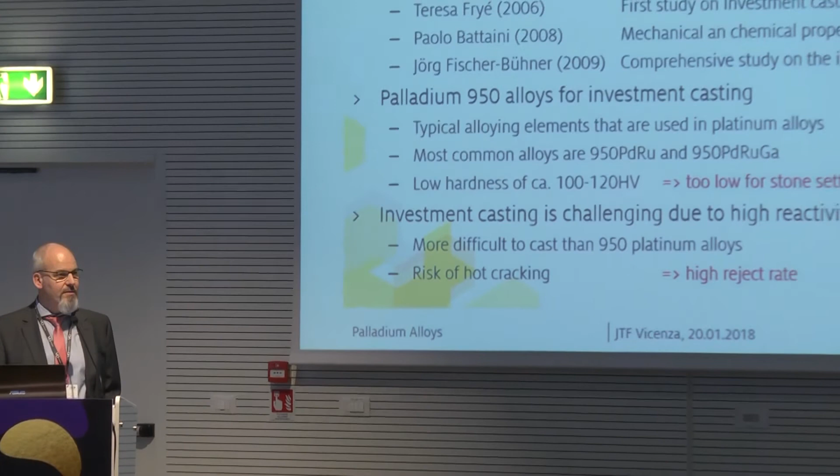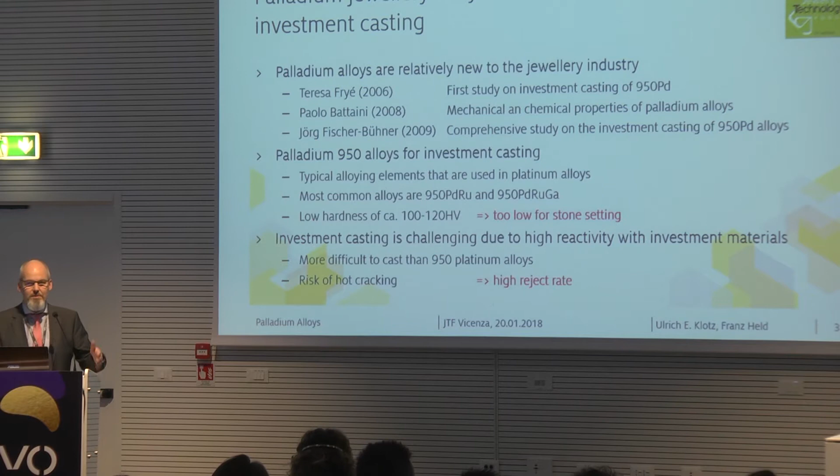Palladium is relatively new in the jewelry industry. Maybe 10-15 years ago there were first studies by Teresa Frye on the casting of 950 palladium alloys. Then some years later there was a paper on the mechanical properties of palladium, and about 10 years ago there was a research project at FEM conducted by Jörg Fischer-Bühner, my predecessor at that time.

Casting trials with many palladium alloys were conducted. Then the interest in palladium decreased a little bit, and it came up recently because palladium is always standing next to platinum. Platinum is well known, it's established, but palladium, as I said, is not very well known.

One issue with palladium is the relatively low hardness. We have a Vickers hardness of only 100 to 120 Vickers, which is a little too low for stone setting to hold diamonds or other stones firmly, and therefore there's always a risk of bending and distortion of such jewelry.

But another issue is the production point. Palladium is even more difficult to cast than platinum because it's even more reactive than platinum, so you get the risk of porosity—shrinkage porosity or gas porosity in particular—and there's also a risk of hot cracking.

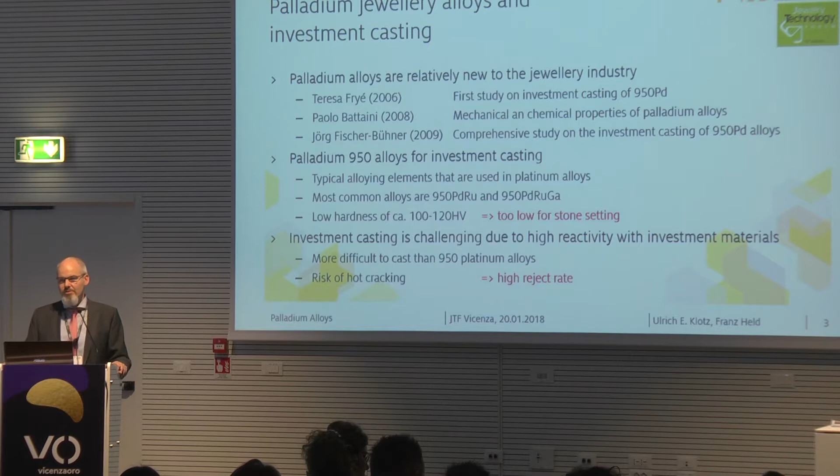This in general leads to quite high production costs, which might be even higher than for platinum, but at the same time the price of palladium was lower than for platinum, and of course the renommée of the alloy is not as high as for platinum.

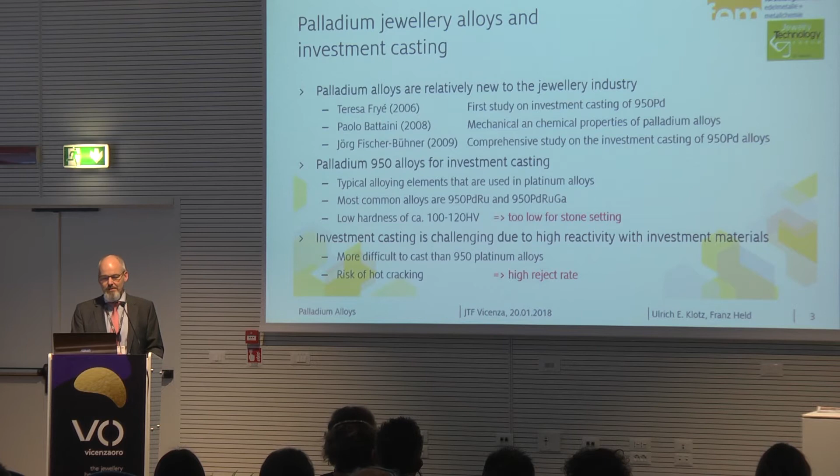So the risk in casting of palladium is demonstrated by some pictures here: a completely broken casting tree where all parts are broken. In the metallographic cross-section they are full of cracks, and in the cracks you see many dendrites—a picture you might know from this morning with these dendritic structures.

If you have a closer look here, you see these dendrite tips, and we measured the chemical composition between the dendrites, finding deep melting phases. The alloy had reacted, in this particular case, with the investment material, resulting in very strong embrittlement and complete fracture. This is a risk in palladium, and such material cannot simply be remelted and reused—it has to be sent for refining.

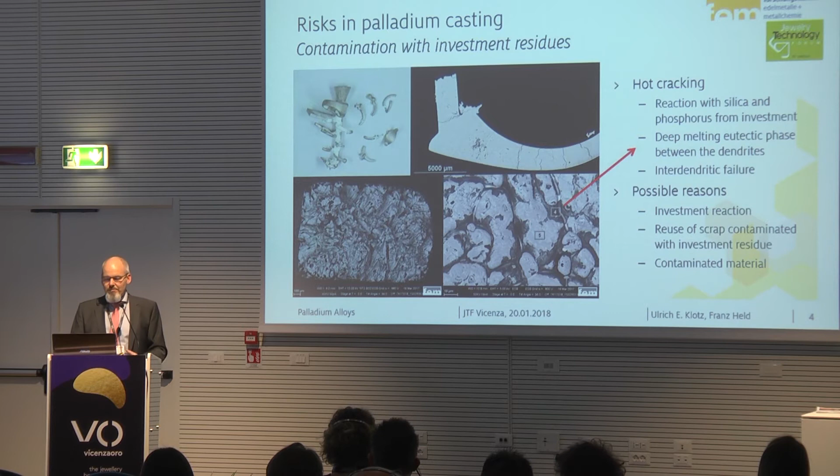With this in mind and in the background, we started the development of new alloys. Nowadays computer technology allows simulation of alloy compositions to determine the melting point or melting interval, and the segregation of certain elements—that is, chemical changes during the solidification process.

You also get information about the reactivity of the melt or even age hardening. With that you can save a lot of time, money, and precious metal, because you can do many calculations and find out what are suitable alloying elements.

Then we started working. We developed about 40 alloy compositions, tested them, made centrifugal castings, and evaluated the most important parameters like form filling, surface quality, porosity, and hardness, which was one of the key points. Our benchmark was always the most established alloy, 950 palladium ruthenium. But if this alloy is established, why do something new?

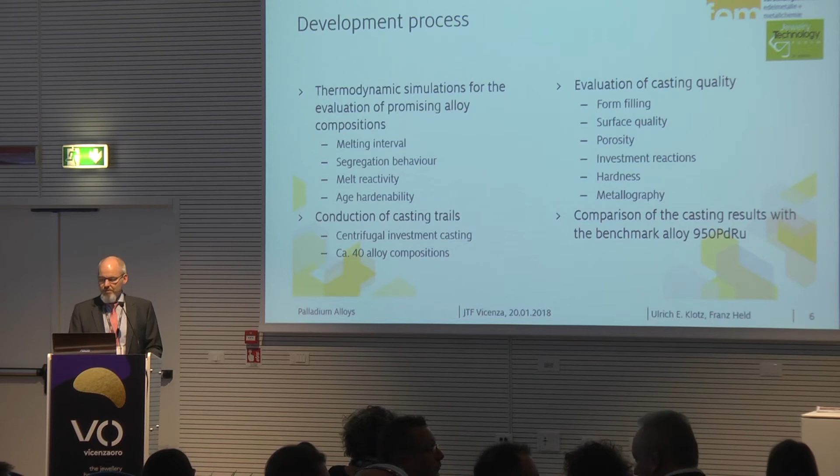The figure here I show is the so-called phase diagram. It shows the melting and solidification temperature of a mixture of alloys. On the left side you have pure palladium, on the right side pure ruthenium. Our alloy is here, and this line shows the melting temperature, or exactly the melting interval.

Such phase diagrams allow metallurgists to understand materials and their behavior. Our objective was to have form filling, feeding, and micro shrinkage at least comparable to 950 palladium ruthenium, but with hardness in the range of 130 to 160 Vickers, an established value for platinum alloys with good properties. This provides suitable stability. We also want a certain grain refinement to get fine grain structures, which have more homogeneous properties and higher hardness.

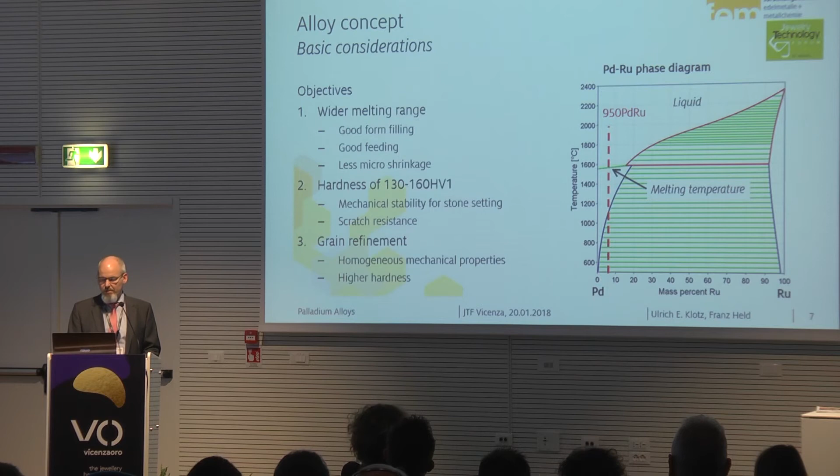But of course not all elements are suitable. Some of them are toxic, like tellurium. Others, like silicon and germanium, can result in very severe embrittlement, like what I showed you in the beginning. Others, like zirconium, niobium, vanadium, titanium, are very reactive and not suitable for the investment casting processes used in the jewelry industry.

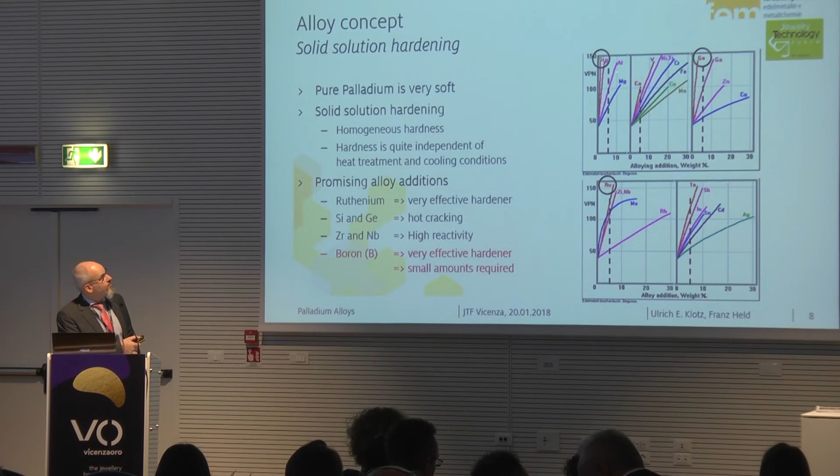Gallium is also an element that is used in platinum, but it's not working as well in palladium. Here I showed you the phase diagrams of the palladium-gallium and the platinum-gallium systems.

The red line shows 95%. On the right side you see the platinum system. The red line is intersecting this line here, meaning there is so-called precipitation hardening. Small precipitates of an intermetallic compound of gallium and platinum form, resulting in significant hardening. But this does not work as well in palladium because palladium has a higher solubility, so the hardening effect is much less pronounced. Similar effects occur in other elements like indium and tin that are other candidates.

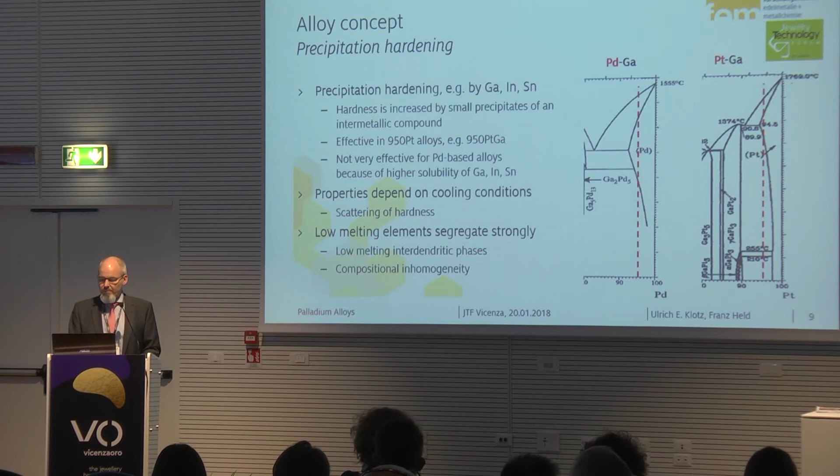Therefore, we were not sure if gallium would be the right choice. So then we started with the simulation, and here I show you such a simulation result.

The lines here, each color stands for a certain chemical element. This shows the liquidus temperature, the upper line, and the lower line is the solidification temperature for each element. This gives us an idea, if we add 5% of each element, how this affects the melting temperature.

Our objective was to widen the melting range a little bit, because in palladium ruthenium it is very, very narrow, and this is detrimental for casting because it allows very low feeding. So the metal solidifies all at once as the temperature is reached, but if you have a certain melting range, the metal can flow longer.

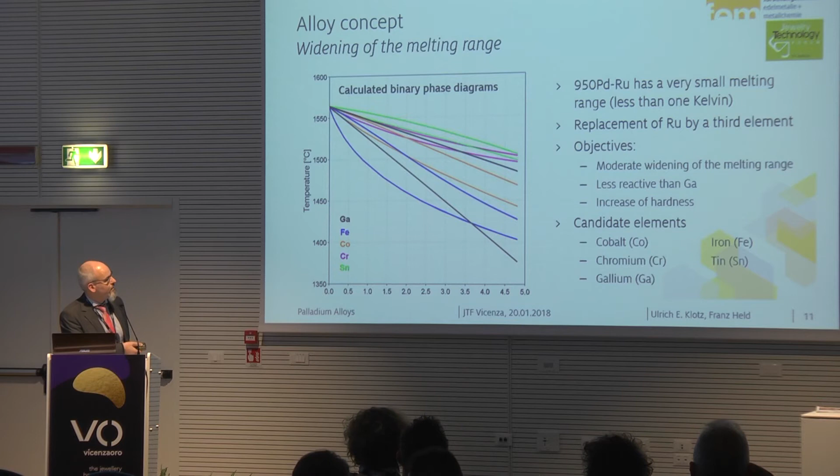So we think there are some candidate elements that lower the melting range. There are more elements like rhodium, platinum, gold, silver, and copper. They also have effects on the melting range, but their effect on hardness is very low. Therefore these elements were of less interest.

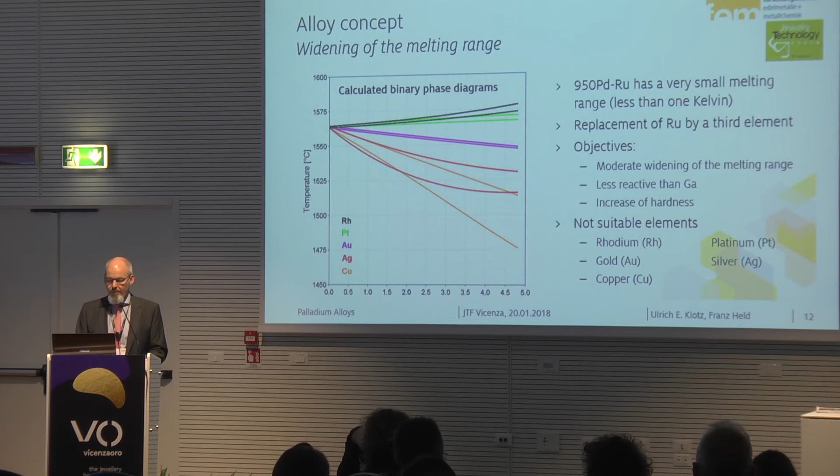Then here comes the first list. This is a selection of alloying elements that we prepared. We have palladium, ruthenium as the basis. Then we added cobalt, iron, copper, chromium, and so on. With these basic binary alloys, we could make mixtures of many alloys that contain, for instance, palladium, ruthenium, and cobalt, so we could vary the composition quite easily in a very effective way.

Then, as I said, boron was an interesting element. Here we added very small amounts, 1 to 5 per mil only. Aluminum was an interesting element, and we also tried things like zirconium, but as I said, this is very reactive.

We started with these elements, with these alloys, rolled them, determined some basic properties, and then alloyed them to make ternary alloys.

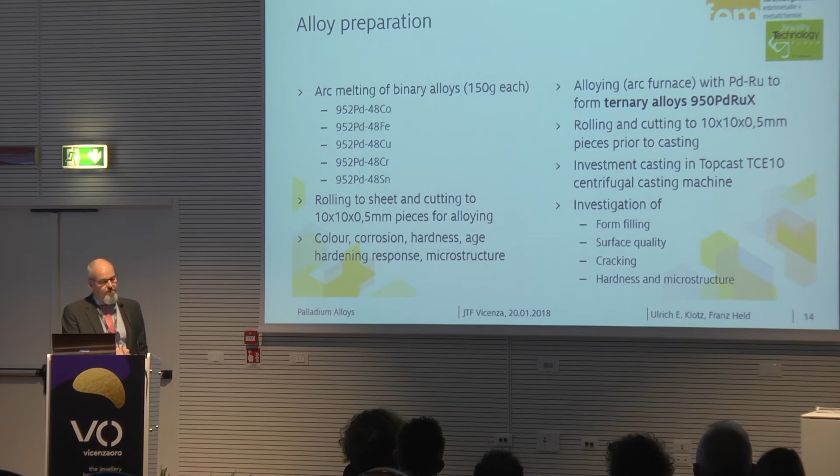With these ternary alloys, we did our investment casting trials, with the properties characterization. This is a typical casting tree that we set out: a thin main sprue and then some standard parts like a grid for form filling, a plate for surface characterization,

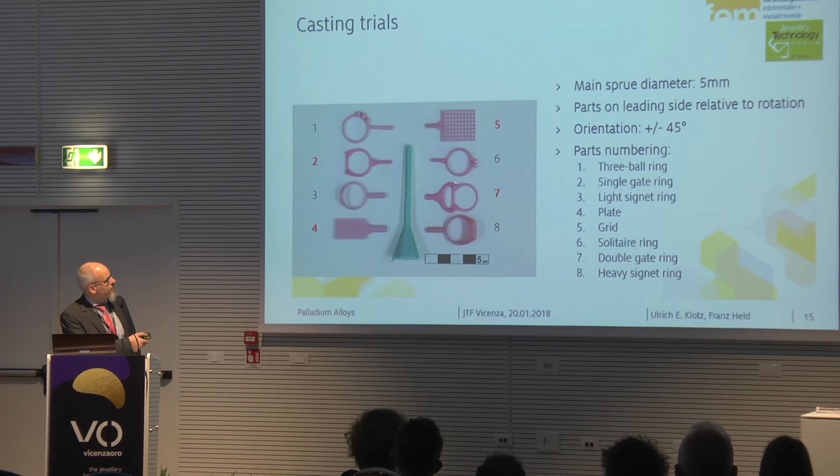or these rings which are basic rings to mount setting areas for diamonds. Here in this section, we call this one the single gate ring with one gate at the thin section. This morning you learned that this is not a very good situation because you get shrinkage porosity here. And then we had an opposite ring, which we call the double gate ring, with sprues at the thicker section.

So these are just some examples that allow us to get a principal understanding of the material.

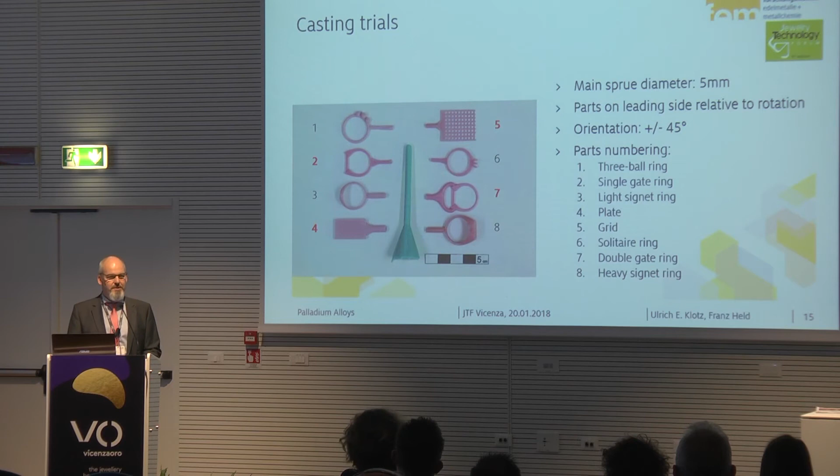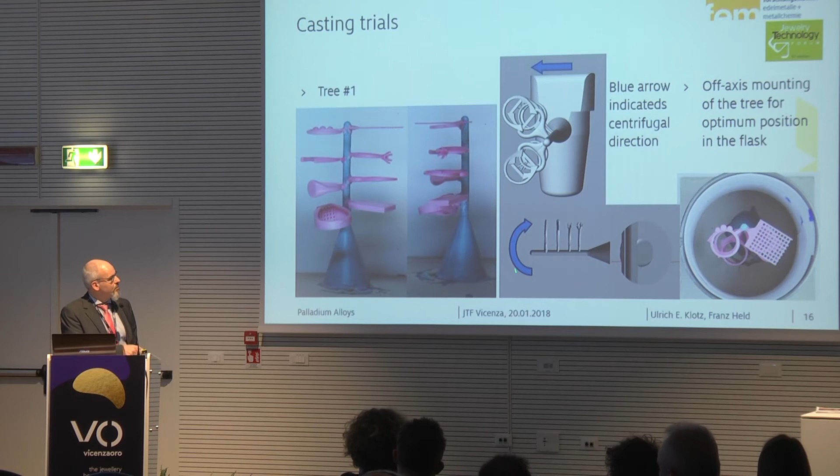We prepared wax trees, mounted them, and used them in centrifugal casting. This is a model of the tree and the crucible, and here you can see how the parts are mounted. The blue arrow indicates the centrifugal direction, so the parts are mounted on the leading side of the tree, which gives optimum form filling.

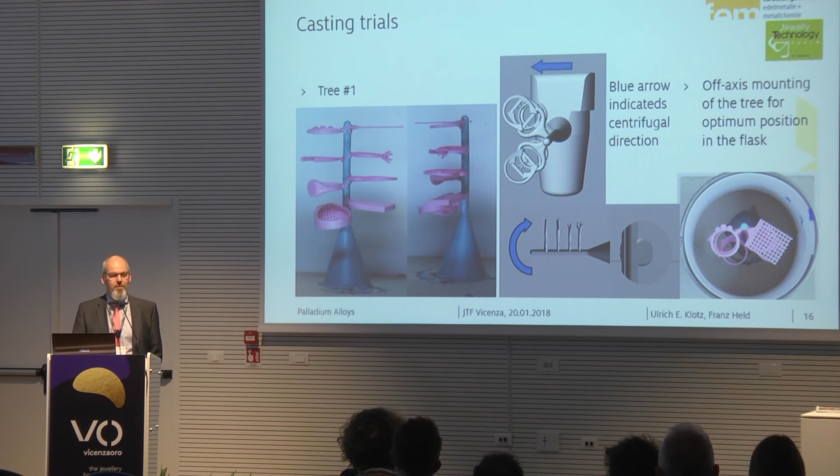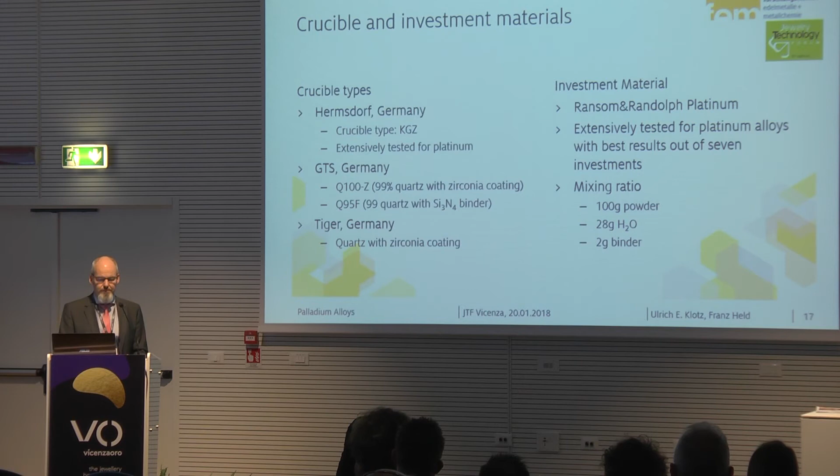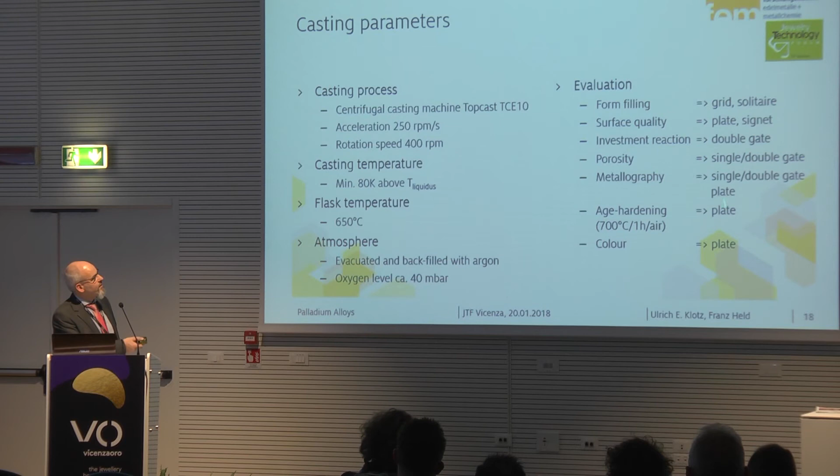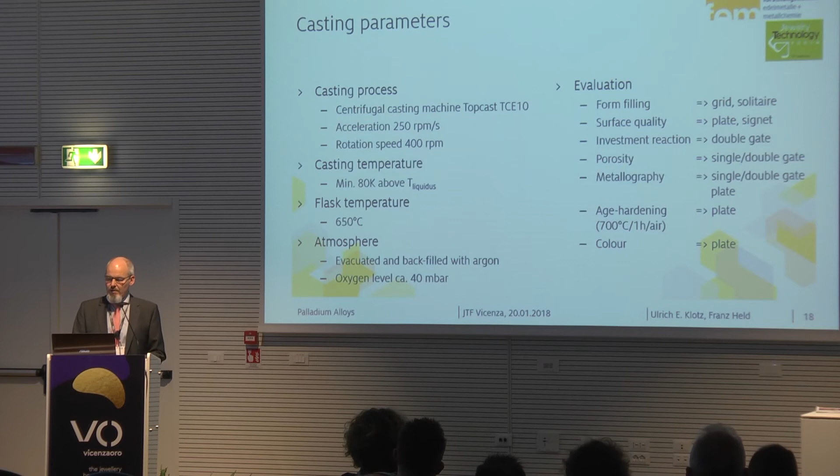These are all the investigations we made on the different parts, and we also tried some hardening treatments. Now, when we do the process, we have to take care of the process control, and therefore we work with a standard casting machine, but we have some sophisticated characterization methods in line during the process.

For instance, we have a thermal imaging camera which is mounted here and has a view on the melt. This is a typical image at the moment where the melt flows out of the crucible, so we can record the temperature very precisely, and we can identify different situations.

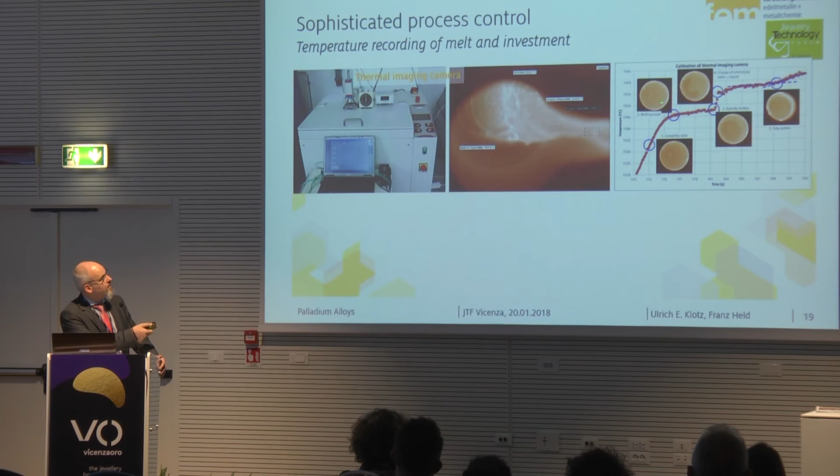So here everything is solid. Then melting starts, then there is a jump here - this jump is a measurement effect that happens during the melting process.

And then we get the melting temperature, and then there is a kink here in this line, so it's more or less horizontal, and then it increases. This is the point where melting is completed, and then you have to have a precise temperature control to cast at the right point.

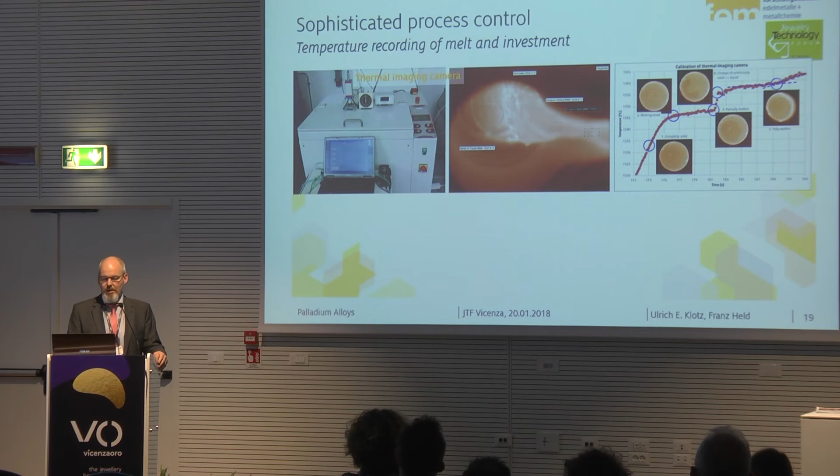We also learned, thank you Jörg, it was very illustrative. Without your presentation I could not do this one.

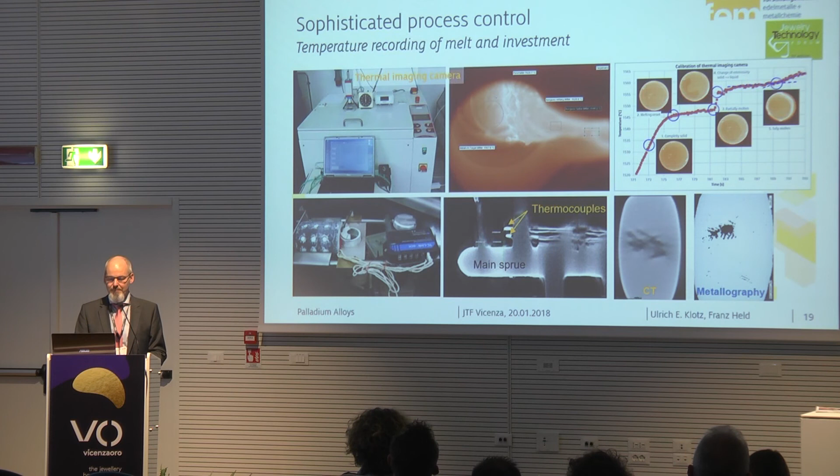Well, the casting result - we assessed several new alloys, interpreted the results, and we did it in a way like this. So this is a typical casting result, the tree after casting,

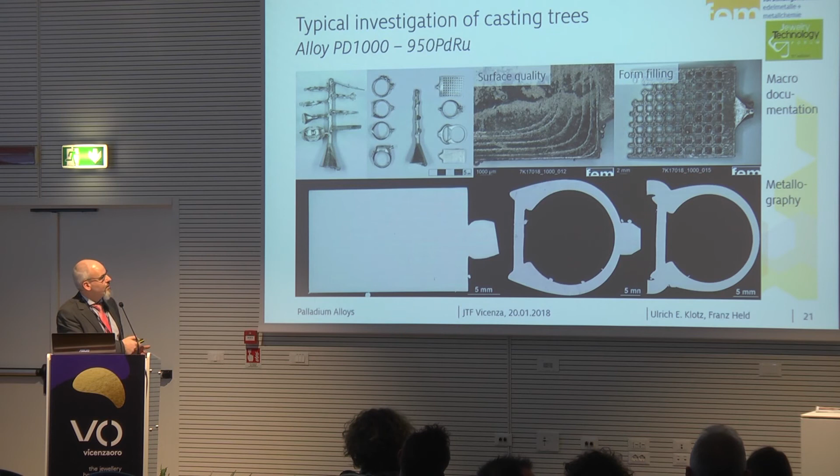parts cut from the tree. We get the surface quality, form filling, and metallography. And now we found different cases.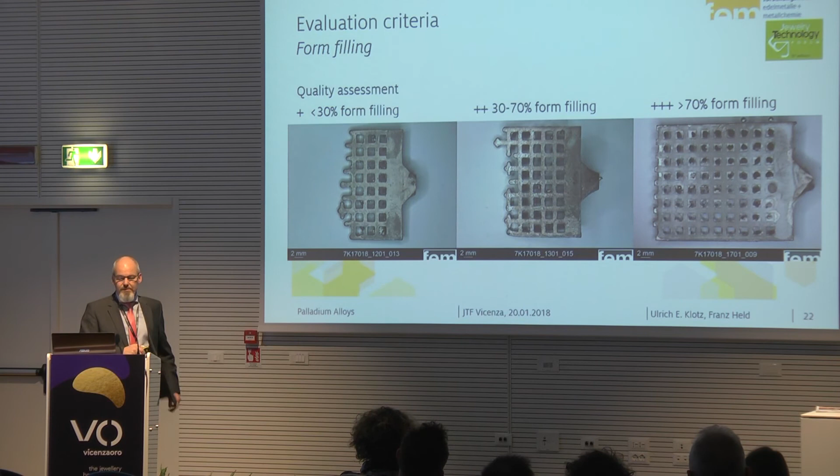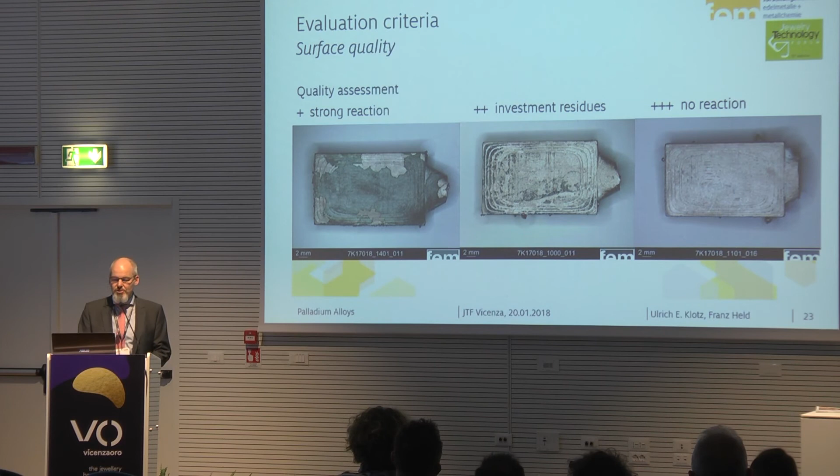We assessed typical parameters like low form filling, medium, and high form filling. Similar for the surface reaction - strong reaction, some residues of investment, and no reaction. And the same with porosity and cracks.

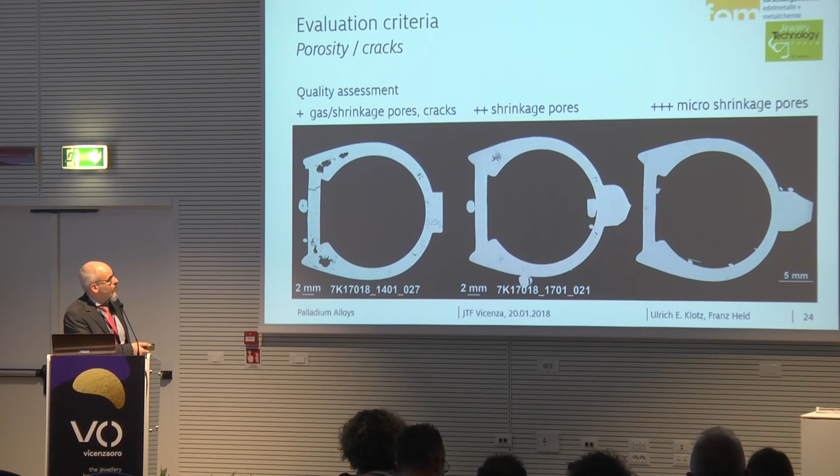Of course, this is useless quality with cracks and many pores. Here we have some porosity, and this one is more or less free of pores.

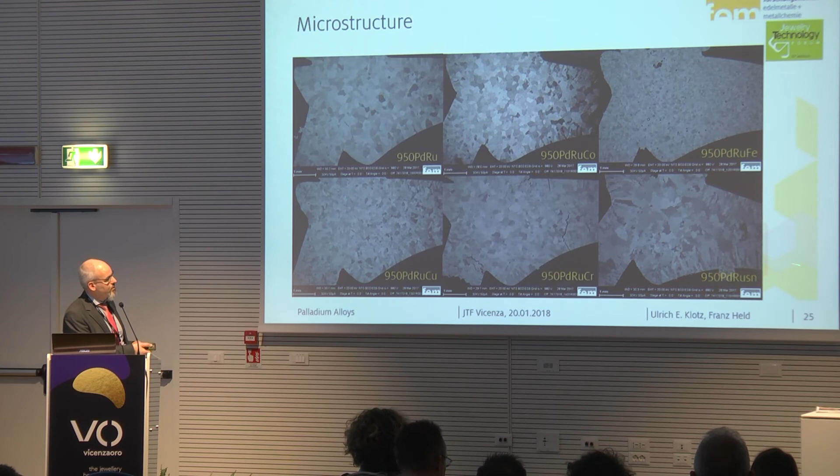Microstructure - this is a close-up view of the images you just saw, but here we see the grain size. So we see palladium ruthenium has a medium but relatively regular grain size. Elements like tin result in a coarsening and columnar grain size here at the edges, and additions like iron result in a very fine grain size, which is beneficial.

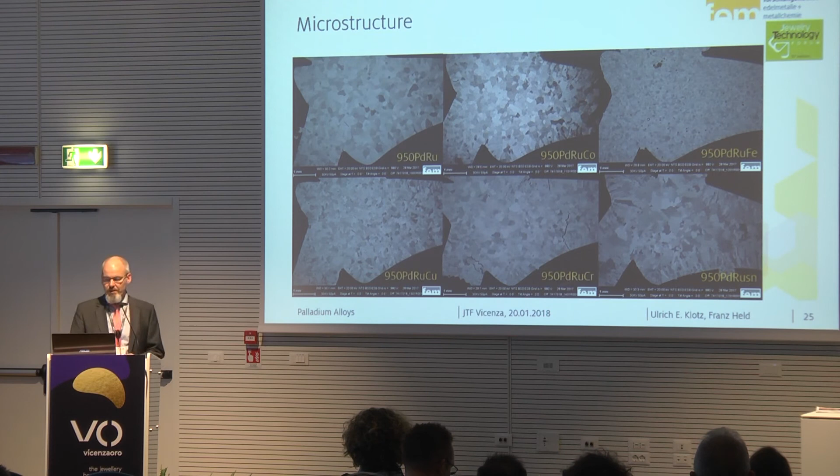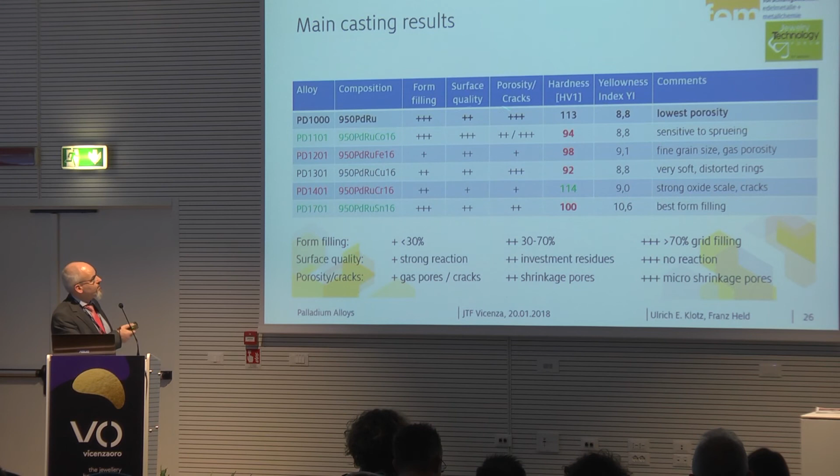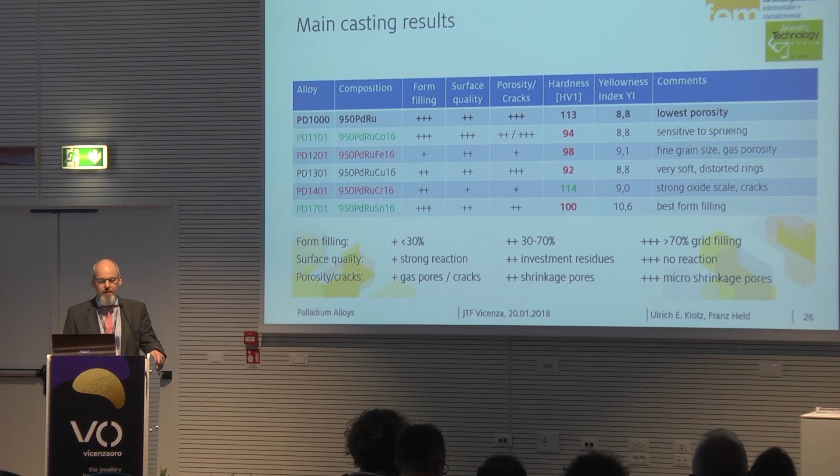Chromium results in cracks. So this gave us a rough estimation, but you see some how the different elements perform, but you see that all elements result in a lowering of hardness. So we have to address this point, and here boron comes in.

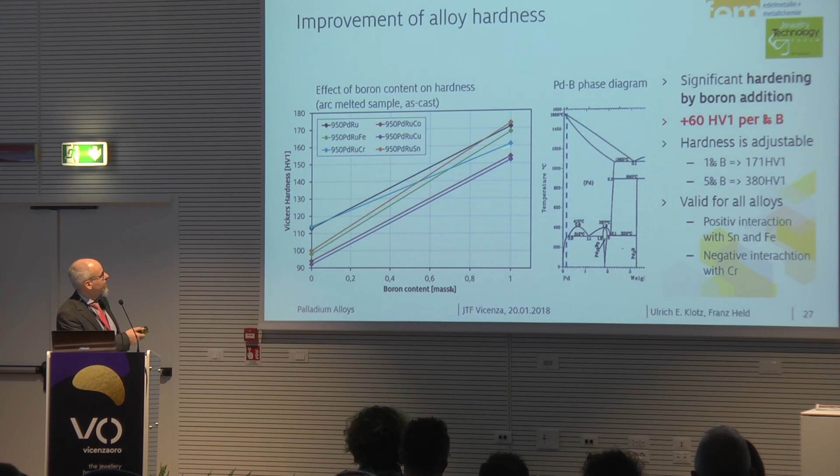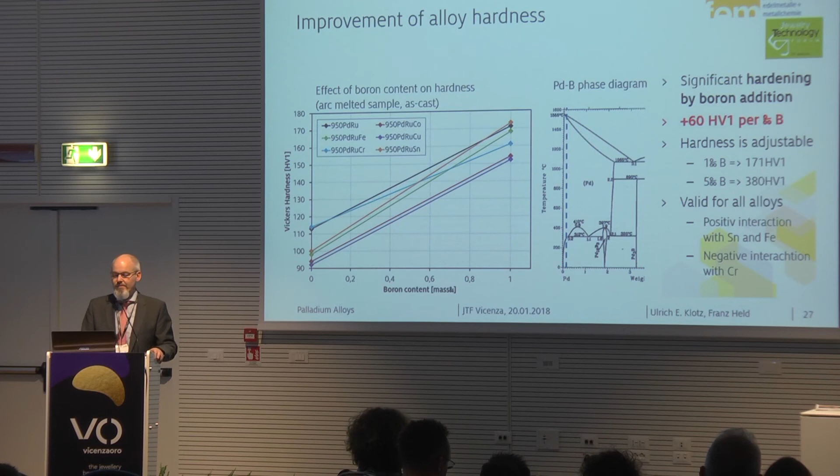This diagram shows the effect of the addition of boron to these alloys, and you see that boron has a strong hardening effect. It pushes the hardness from around 100 to around 150-160 Vickers, exactly the region where we want to get. In some alloys the effect is stronger, in some it's lower, but it's a general trend. Roughly we can say we gain 60 Vickers hardness points per percent of boron, and we can get to extremely high hardnesses, which of course we don't want to have.

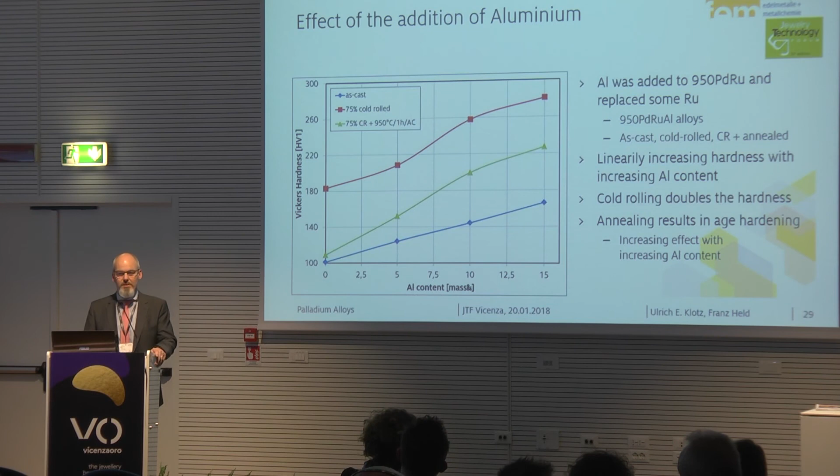We also tested aluminum, and we see the blue curve here, the effect of aluminum content on the hardness. We get a linear trend with 15% we get also in the right range of hardness. We see that these alloys show a certain age hardening: we cold rolled the material, then we get a strong increase, and then we annealed it at a certain temperature, and we get a certain difference. You see that the difference increases with increasing aluminum content. So this is also an interesting result.

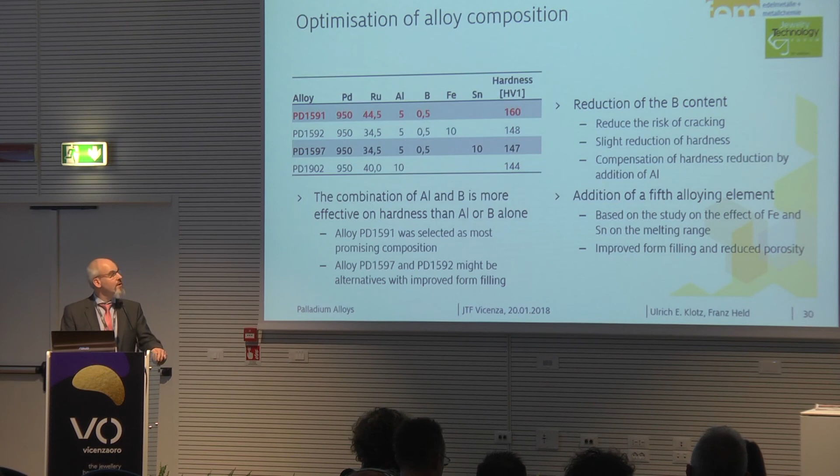After some more iterations, we came up with 4 compositions that we found are very promising. We found that the combination of boron and aluminum is quite beneficial, and that we don't need very high additions to get into the desired hardness range. Iron is beneficial for grain refinement. Tin is beneficial for increasing the melting range. So these were 4 compositions which were promising, which met the objectives of the alloys we wanted.

However, you have to keep some points in mind. I won't go in detail through this list of how to work with these alloys, but you have to keep in mind one point.

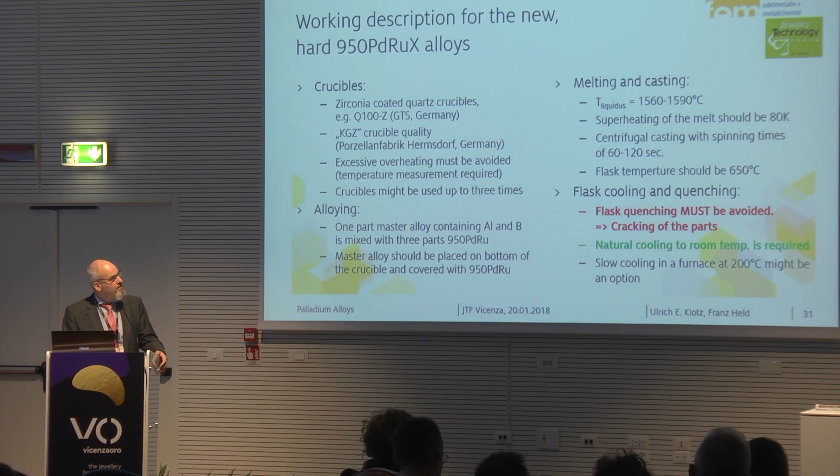This is the flask quenching. Usually after casting, you leave the flask for some time in the casting machine to cool down, and this is very important for these palladium alloys. This is demonstrated here: if you take out a flask immediately after casting and quench it, all the parts are broken. So this is, of course, not good, and we have to take care of this point. Even if you quench from 600 degrees, still many parts are broken. If you quench from a lower temperature, the filigree parts are still broken. This means you have to cool these flasks down to room temperature very slowly. This is specifically important if you add boron.

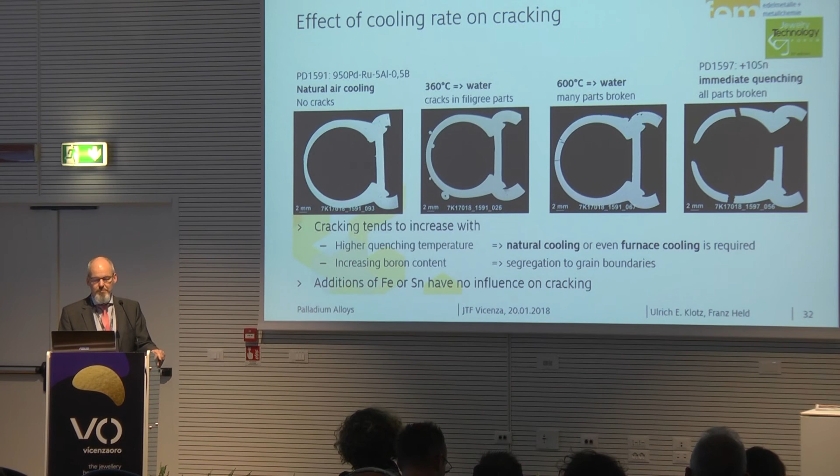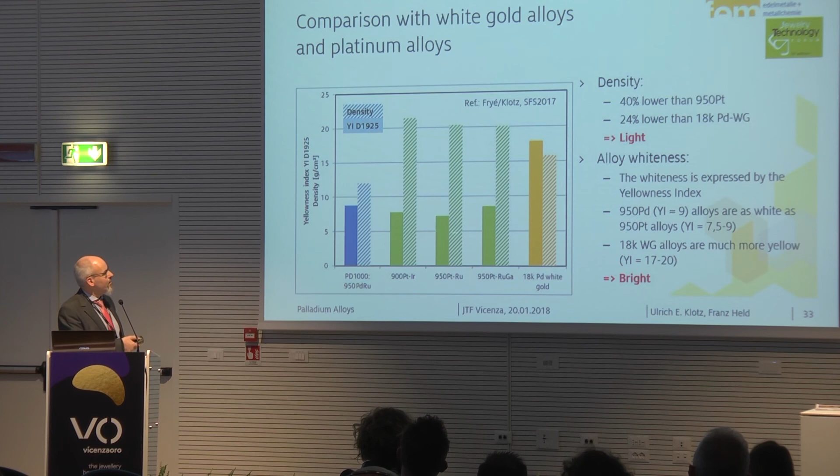Now let's compare the new alloy with some other alloys, with white gold and platinum alloys. Here I plotted the density and the yellowness index, which is the color of the alloy. You see that the color of the palladium alloy is quite similar to the platinum alloys, and these alloys are much whiter than 18-karat white gold alloys. So they don't require any rhodium plating. They have a yellowness index which is below 10. The density of palladium is around 11, 12, so this is much lower than platinum, but also lower than white gold. So we can say the alloys are light, so you can make bulkier parts with less weight compared to platinum or white gold. They're also bright and don't require rhodium coating.

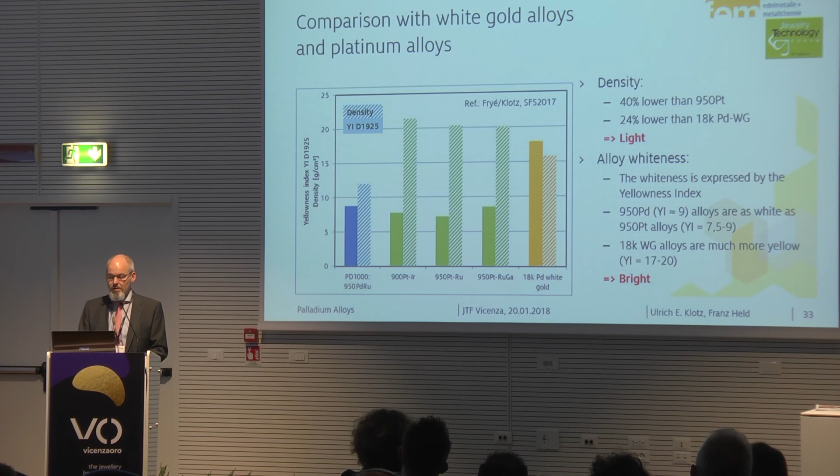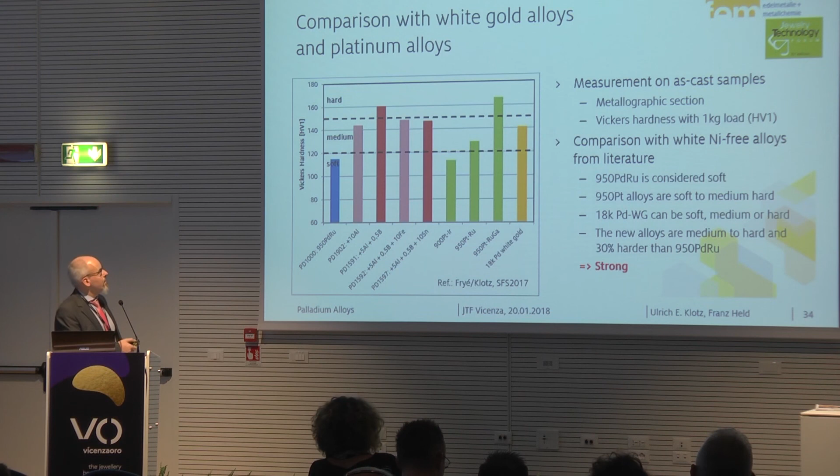Now this is the hardness diagram. This was the standard palladium alloy, quite soft, below 120 Vickers. These are some platinum alloys where we have a great variety. Also for white gold, of course, you can have from 120 to over 200 Vickers. The new palladium alloys are here in the range from medium to hard, so the alloys are strong enough for stone setting.

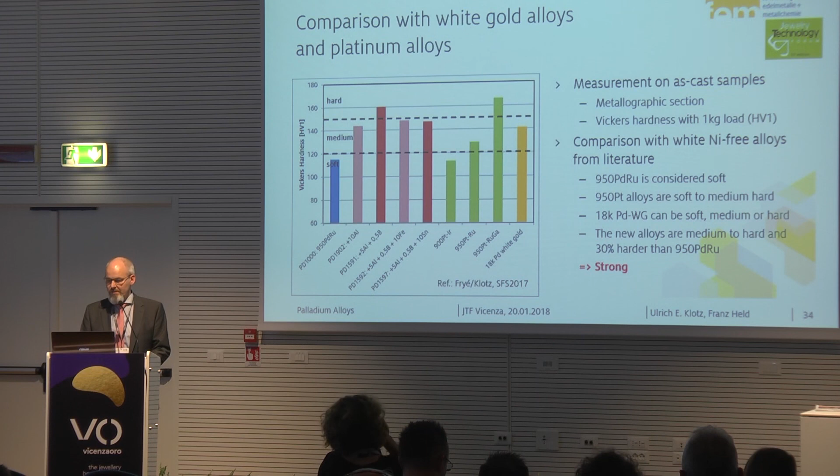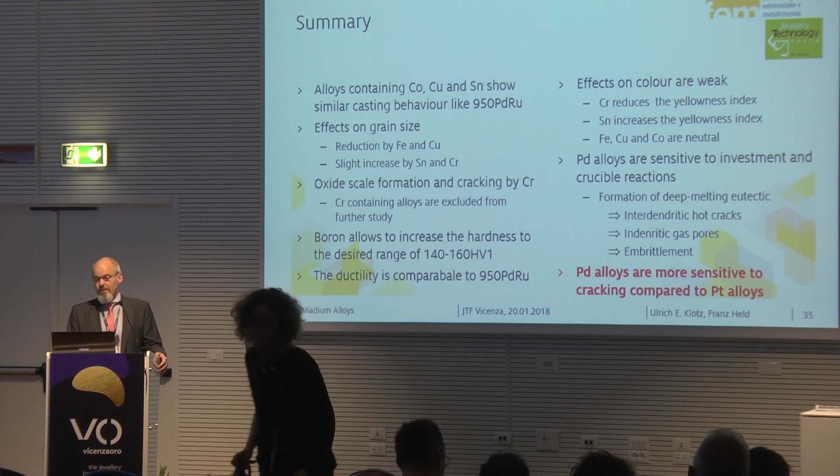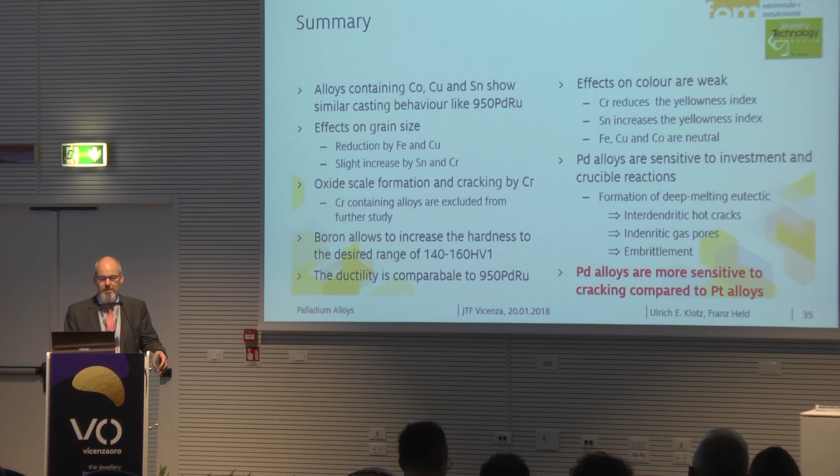Now let me summarize. We developed new alloys based on 950 palladium ruthenium with addition of iron and tin. But mainly the main effect was the addition of aluminum and boron that allowed us to reach hardnesses of 140 to 160 Vickers. Ductility is comparable to 950 palladium ruthenium. The alloy requires some specific processing: quenching has to be avoided from casting, and you have to have good control of your casting process. So companies that can cast platinum successfully should be able to cast these alloys as well. These are the compositions: light, bright, and strong. This is the main summary.

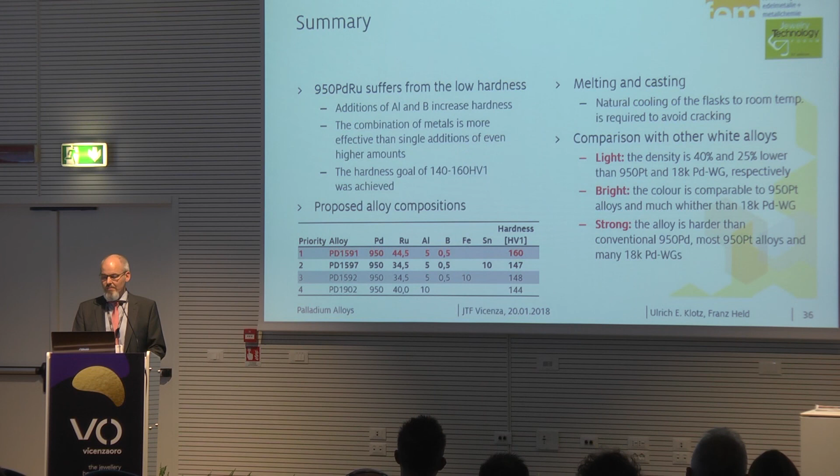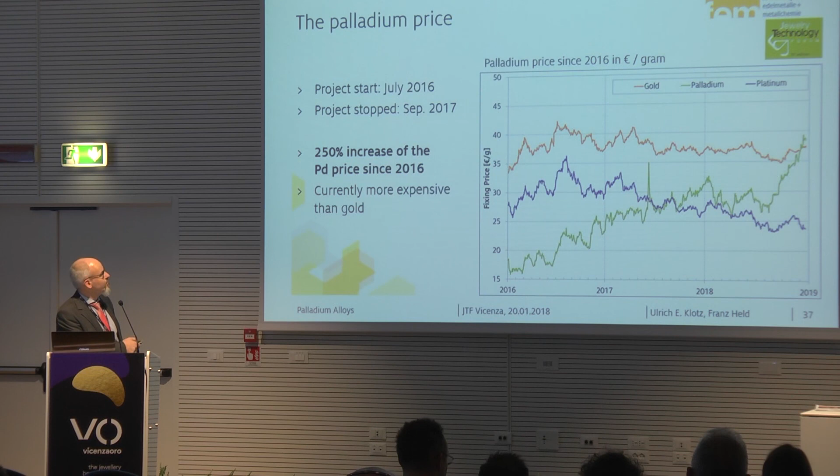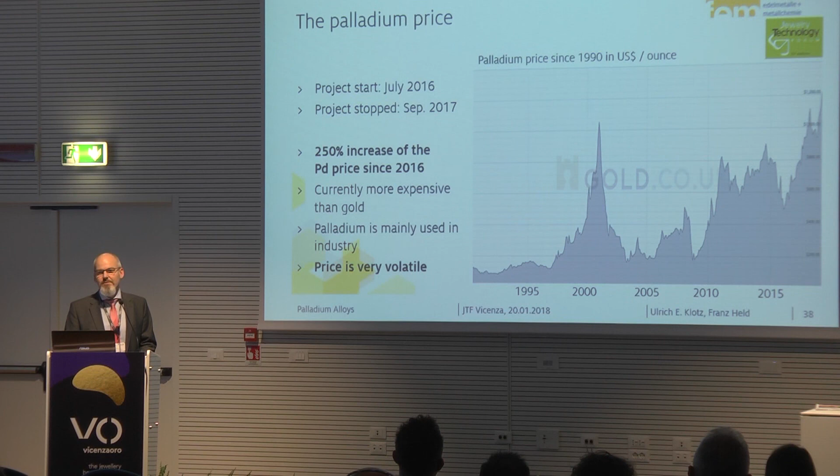But now at the end, let me mention one point. We started the project in July 2016, and then it was stopped in autumn 2017 because the palladium price significantly increased. Here the green line, you see the palladium price was going up since 2016. Platinum price was going down due to requests in the automotive industry. But we see that palladium is very volatile, because it's mainly an industrial metal and not so much a jewelry metal. So the price might come down, and then there could be an interest in such alloys again. Thank you very much for your interest.